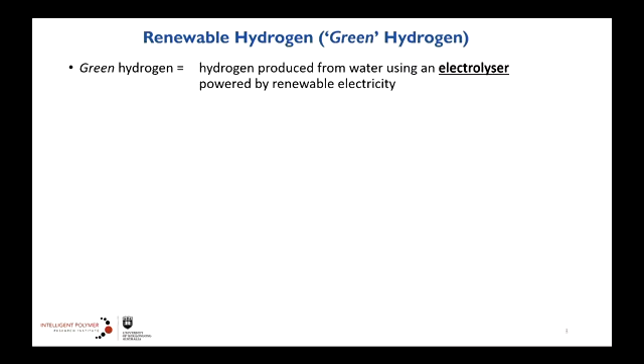Thanks very much, everyone. I will be talking today about a new type of water electrolysis that we developed called bubble-free capillary electrolysis and its application to industrial water electrolysis. So, first of all, let me start by talking about renewable hydrogen, which is also called green hydrogen. Green hydrogen is hydrogen produced from water using an electrochemical device called an electrolyzer. And that electrolyzer, to make green hydrogen, has to be powered by renewable electricity.

Now, green hydrogen is effectively a renewable fuel. In other words, you capture the renewable energy in a fuel, and it's a very energy-dense fuel. It contains 33.3 to 39.4 kilowatt hours of usable energy per kilogram. That is significantly more than petrol or diesel, which is around 12 to 14 kilowatt hours per kilogram, and way more than lithium-ion batteries, which are only around 0.265 kilowatt hours per kilogram. So it's potentially a store of renewable energy that you can transport and use in other places.

At the moment, green hydrogen offers the only viable way to decarbonize a whole host of economic sectors called the hard-to-abate sectors. These are things like shipping, aviation, heavy transport, and chemicals. If you think about a passenger aircraft flying between continents, there's no way that can be powered by batteries. Batteries just are not energy dense enough, but they can potentially be powered by hydrogen. That's really where hydrogen comes in. Those sectors produce about 30% of global CO2 emissions, and green hydrogen is pretty much the only way to decarbonise them.

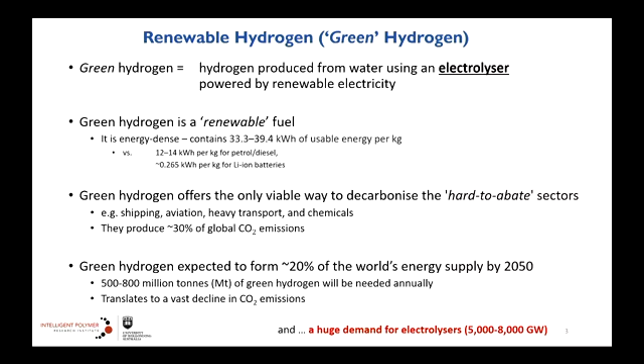That means we will need around 500 to 800 million tonnes of green hydrogen produced annually by 2050, which obviously translates to a vast decline in CO2 emissions, but for the purpose of this talk, it also translates to a huge demand for electrolyzers, around 5,000 to 8,000 gigawatts. To give you an idea of that scale, the entire Australian electrical grid is less than about 50 gigawatts at the moment. So we're talking a huge demand for electrolyzers.

So what are electrolyzers? As I said, they are electrochemical devices that produce hydrogen from water using electricity. Electrolyzers have actually been around for over 200 years. The first electrolyzer was developed in around 1800, and they've been used industrially for well over 100 years. Back in the 1900s, various governments were using them to fill military observation balloons. Those were probably the first real industrial application for electrolyzers.

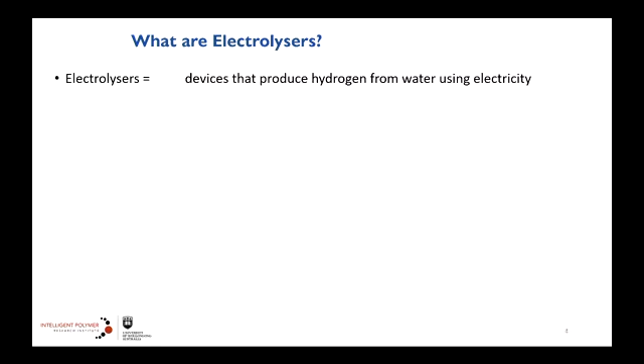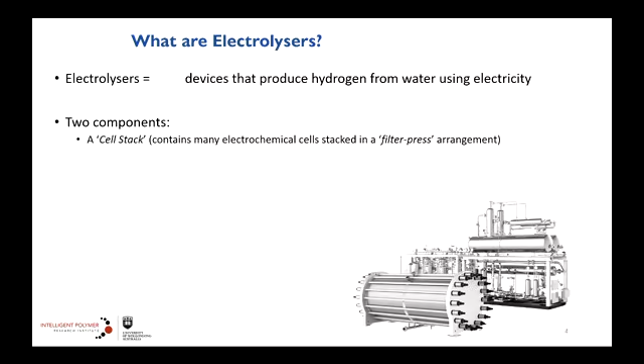So what do they consist of? So this is a picture of an electrolyzer, and you can see that there are two components here. Firstly, there's what's called a cell stack. So that's the thing in the front, that round thing. That contains many electrochemical cells all stacked in what's called a filter press arrangement. So each cell is disposed as a planar disc, and then you have many of these planar discs all stacked together, and each of those discs is producing hydrogen, and the hydrogen is all collected together, and it comes out of this thing called the cell stack.

And then the second thing that you have, and they come in different sizes. This is a small cell stack that you can buy. You also get very large ones. In fact, some of the largest are probably several meters high. And then the second part of it is what's called a balance of plant, which is the engineering system around the cell stack that manages the cell stack. So that's the thing at the back of this picture. And you can see there are various tanks and pipes and pumps and sensors, etc.

There that manage it. The balance of plants typically are all automated. So they have a thing called a PLC, which will control what goes on inside the cell stack. It'll manage the cell stack. It'll manage the gases coming out, the pressure of the gases coming out, also manages the safety of the system. So the total energy consumption of an electrolyzer is the energy consumed by the cells, and that is by far the majority of the energy needed to make green hydrogen, and then also the energy consumed by the balance of plant.

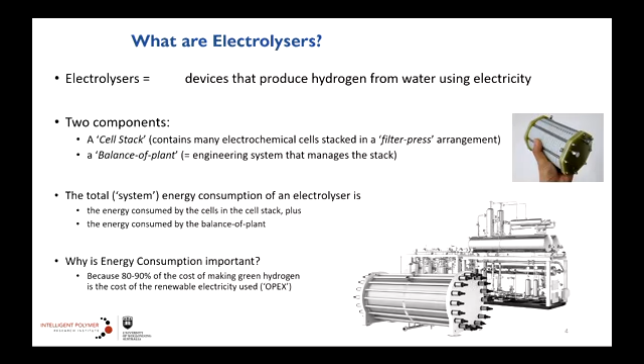So why is energy consumption important? Well, the main reason energy consumption is important is because 80 to 90% of the cost of making green hydrogen is the cost of the renewable electricity used. It's what they call OPEX, or the operating expenditure. And so the more efficiently you can use the renewable electrical energy coming in, the cheaper your green hydrogen is. The less efficiently you use it, the more expensive it is. And then the other 10 to 20% is the cost of the equipment, which is called the CapEx, or capital expenditure.

Okay, so I've been working in hydrogen probably for 30 years, but in the last 12 to 15 years, I've been working in the electrolyzer industry. And a few years ago, I had some students, and we were looking at what is the next big thing going to be in hydrogen. And so we looked at how the architecture of electrolysis cells had evolved over time. And so this is just showing schematics of what electrolysis cells look like and how they've changed.

So on the left here, we've got what could be called a classic electrolysis cell. You've got two electrodes, an anode and a cathode. They're immersed in a liquid electrolyte, an aqueous electrolyte. And you put an electric current through them. And when you do that, the one electrode produces bubbles of hydrogen, that's the cathode. And the other electrode produces the bubbles of oxygen, that's the anode. And then a very critical component here is what's called a separator, which is the thing between the two half cells. And the separator has very special properties.

It has to allow ions, I-O-N-S, to flow between the anode and cathode to complete the reaction, but it has to stop the bubbles of oxygen from mixing with the bubbles of hydrogen. And the reason for that is that if you get more than around 4% hydrogen in your oxygen or 4% oxygen in your hydrogen, then that gas is an explosive mixture. You know, hydrogen and oxygen is rocket fuel, and so you don't want them mixing at all. And so that's what the separator does. Now, as I say, this is a classic cell. This was used for hundreds of years.

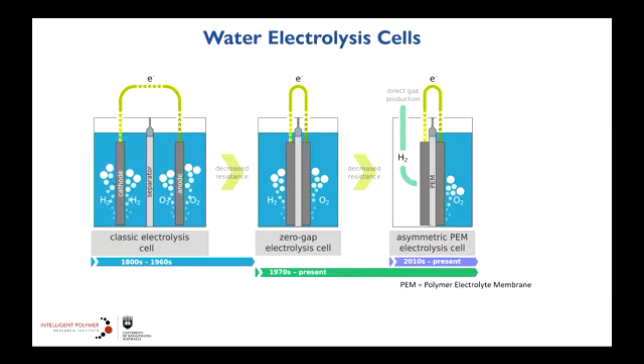And, let me maybe go back here then. How do I go backwards?

Sorry about that. Well, actually, let me go here.

Okay, now I sort of jumped a bit ahead of myself here, so let me just go back a little bit to where I was there. So that was the challenge we were looking at.

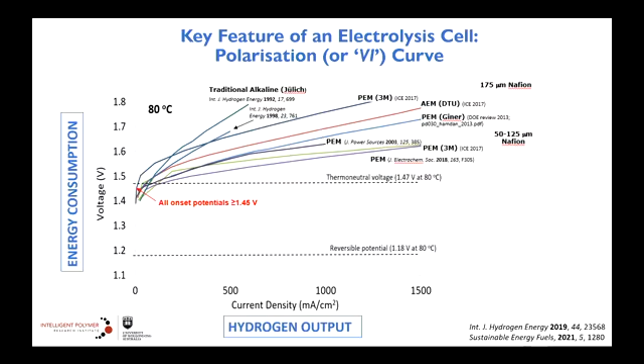And if you're trying to make these cells more efficient, you have to find a way to bring that curve down. And so you have to then find a way to reduce the onset potential. And we've spent a lot of time working on how to reduce that onset potential. It's not something that has been widely studied.

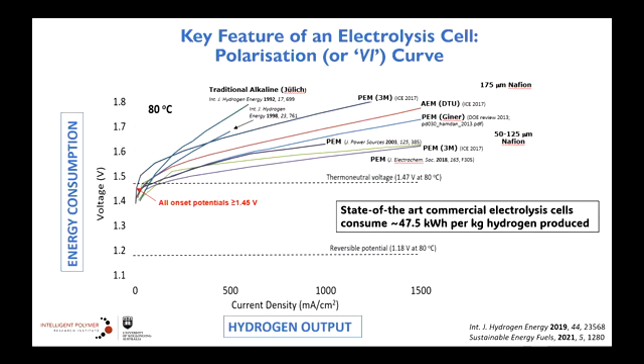But right at the present day, if you look at the best state-of-the-art commercial electrolysis cells, they consume around 47.5 kilowatt hours per kilogram of hydrogen produced. And that is, as I say, the state of the art.

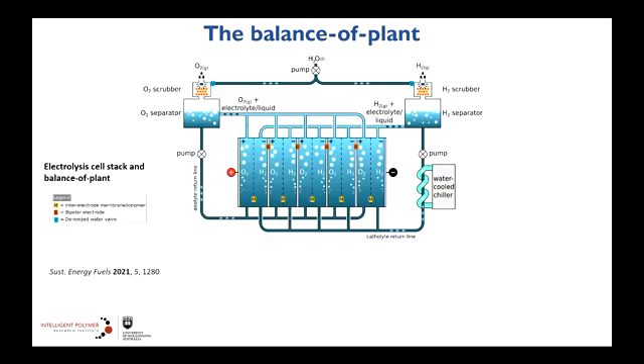So now also these systems produce a lot of heat because they're not very efficient, and so you need typically a water-cooled chiller to cool down the system, keep it at temperature, and you can have that on each return line or you can have it just on one. And then to replenish the water that's being consumed, you typically would have a pump up here pumping water into the scrubbers where it drips down and replenishes the liquid that's being used.

So what you can see is at least two large liquid circulating pumps, two gas liquid separators, a whole lot of piping, water-cooled chiller, and then you've got, in a typical alkaline system, around 10,000 litres of water per megawatt circulating all the time. So quite energy intensive.

A typical balance of plant would consume between 2.5 to 5.5 kilowatt hours per kilogram. And the way you get to the 2.5 is just having a very large system so you can get economies of scale. But a smallish system, a megawatt, for example, which is still pretty big, would be using around 5.5 kilowatt hours per kilogram. And so the total energy consumed by a conventional system is around 50 to 53 kilowatt hours per kilogram to produce a kilogram of hydrogen.

And hydrogen, as we said, contains, at best 39.4 kilowatt hours per kilogram. So there's a big gap between the amount of energy it contains and the amount of energy used to make it. And so that is what makes green hydrogen expensive at the moment.

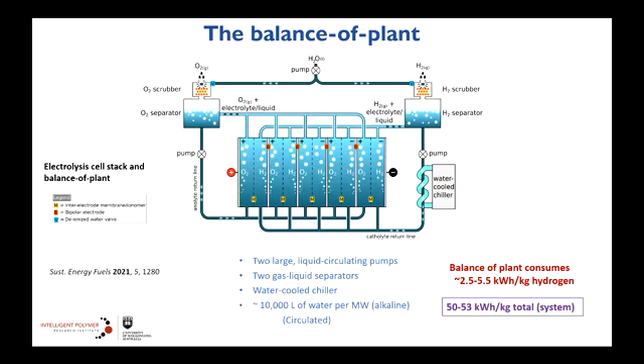So in this particular case, what we were trying was a new way of making the system bubble-free. And so what we were trying to do was to design electrodes which would draw liquid out of the separator, but just enough liquid to wet the electrodes with a thin layer of liquid. And why it needed to be a thin layer of liquid was that when the gas was produced, we wanted it to dissolve in that layer, migrate through that layer and leave.

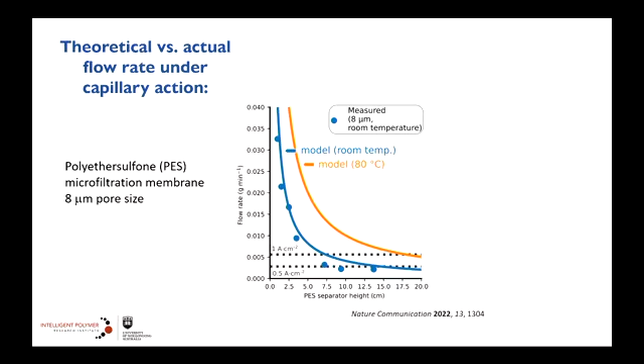And you can see that at 80 degrees, which we couldn't actually measure but we could model, we could sustain an amp per square centimetre to a height of about 18 centimetres. It's about that high. So that's kind of about the height you need to make a commercial cell. And so we then set about testing this particular membrane as a separator to see how it worked.

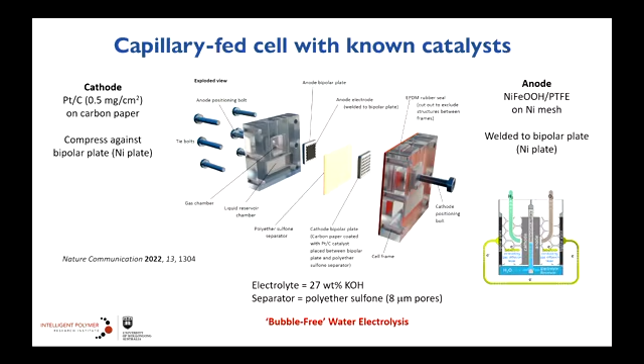We used an electrolyte of 27 weight % potassium hydroxide with this separator, and we were able to observe bubble-free water electrolysis, which was very exciting. And if there's time later, I can explain to you how we knew for sure it was bubble-free. But this was really the key finding out of that work.

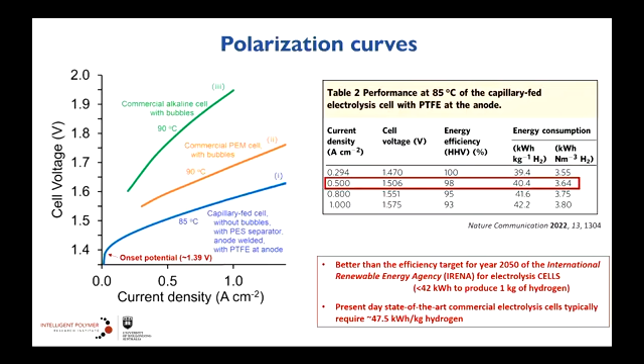And you can see 40.4 kilowatt hours per kilogram cell consumption. The best commercial cells today are 47.5 kilowatt hours, so a significant improvement there. Also for the balance of plant, just because the gases were produced directly in the cell, it resulted in a whole lot of simplifications in the balance of plant that sort of flowed on from that.

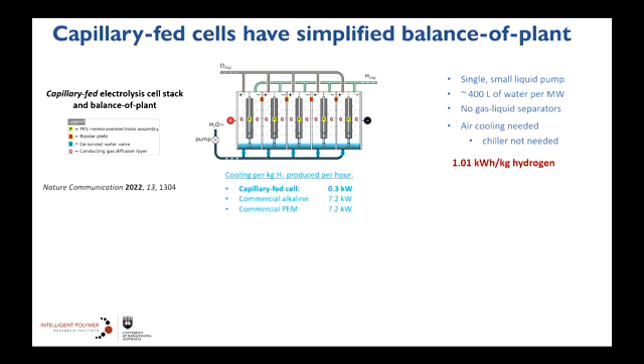And so you have a single small pump for your liquid. You have around 400 litres of water per megawatt, not 10,000 litres. You don't need gas liquid separators, you don't need all the pipes for that, and you don't need a chiller. You can do air cooling of the system. And so this balance of plant only requires around 1.01 kilowatt hours per kilogram. When you add that to the 40.4 kilowatt hours we had earlier for the cell, the total energy consumption is 41.5 kilowatt hours per kilogram, which is significantly better than the best commercial system out there.

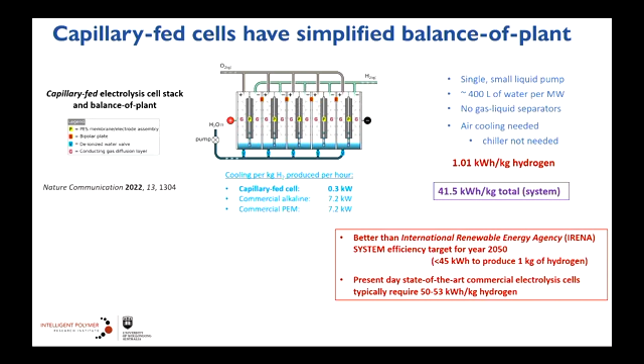And in fact, IRENA also has a target for the system efficiency of electrolyzers for the year 2050. It was that they needed to be less than 45 kilowatt hours to produce a kilogram of hydrogen. You can see we're already substantially below that. Today, the very best commercial electrolyzers require system energy consumption of around 50 to 53 kilowatt hours. So around a 20% improvement in efficiency. And that obviously has a big effect on the cost of the green hydrogen that you produce.

And so once we realized all of this, we set up a spin-off company we called Hysata. That was spun out in 2021. And this is just a quick summary of the value proposition. So first of all, it offers the lowest levelized cost of green hydrogen in the industry, and that's mainly because we have much lower OPEX. It turns out we have a lower CAPEX because we have a much simpler stack and a lower cost balance of plant. It also turns out that this architecture is very amenable to integration with renewables.

One of the issues with renewable energy is that it fluctuates. You know, as a cloud goes in front of the sun, your current goes down. As the wind stops blowing, and so you tend to have fluctuating currents with renewable energy. And a key issue for electrolyzers is to be able to follow that current.

And so you need dynamic performance. Now, a lot of alkaline electrolyzers in general can't follow that sort of renewable energy very well because they have all this stuff pumping around all the time. In our case, we have very fast dynamic performance. In fact, we believe it's the fastest in the industry. It tracks changes in current extremely rapidly. We haven't been able to measure how fast it adjusts, but as fast as we can change it, it follows it. And so we can track renewable electricity down to almost zero, as it goes up and down.

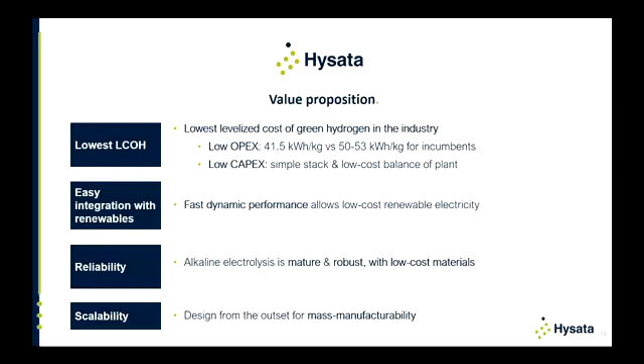In fact, before our first investors would invest, they sent 2 engineers to work with us to make sure that this technology could be turned into a high volume manufacturing process. And we actually worked with them for about 6 months before they would invest. But they were convinced at the end, and we have developed this now into a technique, into a cell that can be mass manufactured.

So this is a very high level cartoon to show you what our cells look like. This is the Hysata cell, made in the form of a disc. We have an injection molded plastic frame that we attach our separator to. That's kind of welded to that. And then we have a cathode that fits in on the one side, an anode on the other side, and we have a reservoir at the bottom. And then we seal this with a nickel disc on the outside on each side. So the whole cell is sealed. But I'll explain to you how the gases get out and the liquid gets in in a minute.

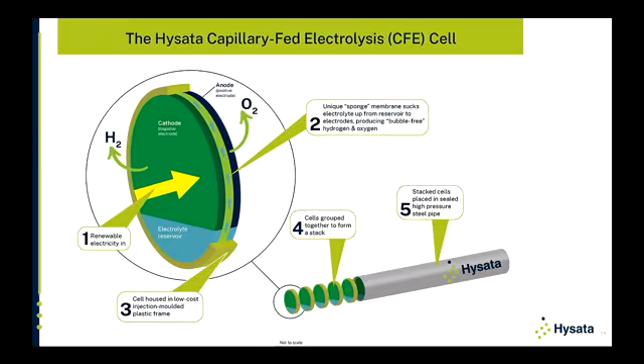And then we take these cells and we stack them inside a pressure vessel, and we're using just a stainless steel pipe, which is the cheapest pressure vessel you can get. You group them together, you put them into the pipe, and then you can make your hydrogen and oxygen. So I can't show you the exact design because unfortunately that is proprietary, but this will give you a high-level view of how we manufacture these things.

So as I say, we injection mold a cell body, which looks like that, and you'll see it has these holes in it, which are called headers. We attach a separator to that. Nowadays we weld it, but earlier we had a frame that held it in place. We then have 2 electrodes, which are tied up against each side. We have a metal spring, a conductive spring, which goes on each side and provides the clamping force to hold the electrodes tight against the separator.

And then we have, as I said, this disc, which they call a bipolar plate. These are nickel discs on each side. They get welded to the cell to make a closed cell. And then you stack these things together, shown over here. And these holes, the headers, all line up, and they form little tunnels inside the stack, and they connect downwards to each side of the separator. So your hydrogen all comes up and goes out via one of these tubes. The oxygen goes out via another tube. And then we have tubes that carry water in and maintain the reservoir, and a tube that carries water out.

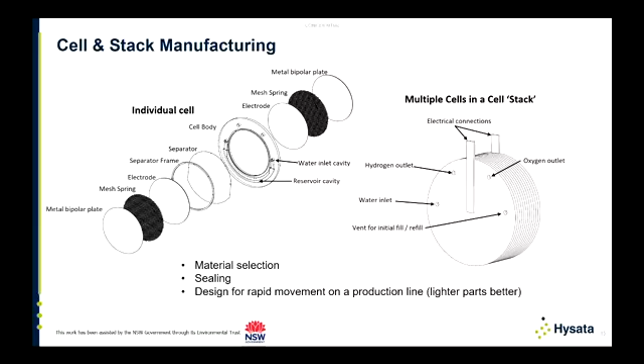And we've developed these now at full commercial size, and significant cells in stack, and they work much as the original technology did. So developing these things, there are a few important factors we had to take into account. First of all was material selection. We had to develop sealing methods. We also had to design them for rapid movement on a production line, and so we wanted to keep the parts light.

The main reason for putting these things inside pressure vessels is that the pressure inside the cell and outside the cell, between the cell and the pressure vessel, is much the same. And so the cell frame doesn't have a big pressure differential over it, and so it doesn't need to be very strong and robust. It can still produce gases at high pressure, but without being big and heavy. And that was because we wanted rapid movement on the production line.

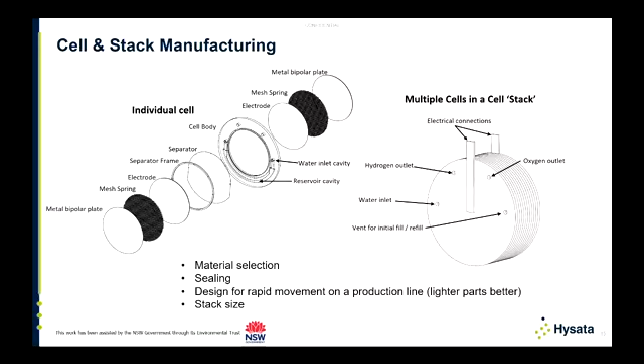And we also had to develop the stack size. So some of the lessons learned there was, first of all, there's a big difference between science and engineering. And I think, well, I've known this for a long time, but I guess maybe other people haven't realized it. You really should partner with engineers early. I'm a big fan of engineers.

Some of the important lessons: we considered the need for high volume manufacturing from the outset. We developed the balance of plant in parallel. On previous occasions, we've tried to develop commercial cells. We've tried to develop the cell first and then the balance of plant, and that doesn't work. You need to do everything in parallel and make sure that both work and they interact well.

Supply chain is really, really important. You need to have your supply chains in place early, especially nowadays with COVID and supply disruptions, long lead times. You need seasoned design, process and manufacturing engineers, and we've been very fortunate in Hysata to hire some very seasoned and very knowledgeable design engineers and process and manufacturing engineers.

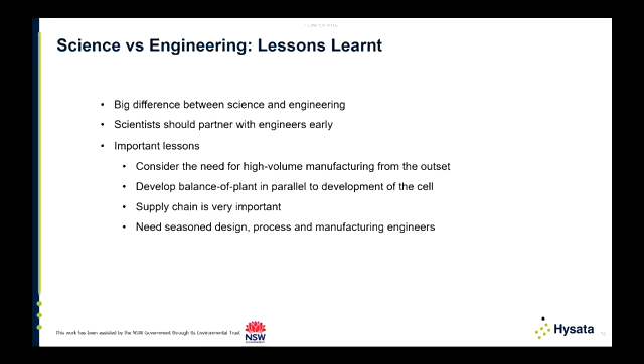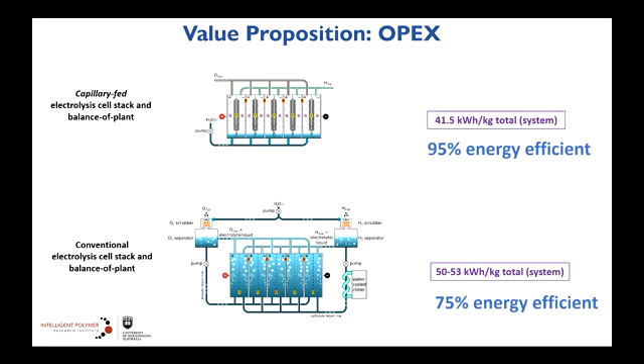So the value proposition, I'll just go back to the comparison of the capillary fed cell with the conventional cell. So the total system energy consumption is 41.5 kilowatt hours per kilogram on the capillary fed cell, 50 to 53 kilowatt hours for a conventional system. So that's around 95% energy efficient all in, taking everything into consideration, versus around 75% energy efficiency all in for a conventional system. That has an enormous effect on the cost of the hydrogen that you produce.

So what we've got here is just an illustrative example of a renewable energy project producing 1 million tonnes of hydrogen per annum. And this is looking at it in US dollars. So there are innumerable energy export projects planned for Australia, and this is the sort of thing that they are looking at. So if you used incumbent electrolyzer technology, you would need 75% efficiency, 52.5 kilowatt hours. You'd need 14 gigawatts of renewables and around 7.6 gigawatts of electrolyzers to make your 1 million tonnes per annum.

If you use the capillary cell system, 95% system efficiency, 41.5 kilowatt hours per kilogram, you only need 11 gigawatts and 6 gigawatts of electrolyzers. You still make your 1 million tonnes of hydrogen per annum. And if you look just at the renewables, there's a 3 gigawatt reduction in renewables. Renewables cost about $1 billion US per gigawatt. So that's a saving of $3 billion US right from the start.

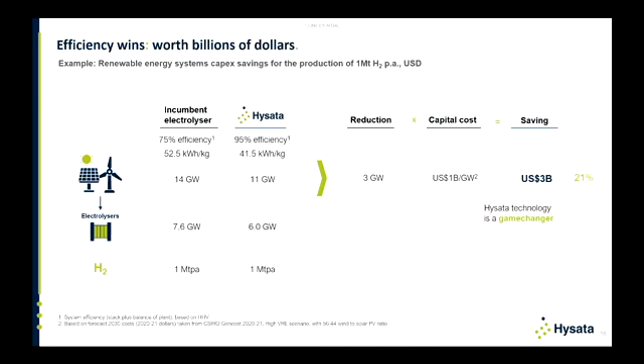And the sort of customers that we are talking to at Hysata are telling us this is really a game changer for them. For many of them, it's the difference between being economic and uneconomic. So we've had a lot of commercial interest in this. And in fact, I think it's fair to say there's been truly incredible demand. Hysata has already signed up $5 billion in orders. Now, these are conditional orders, conditional on achieving the efficiencies that are shown there. But nevertheless, that's quite incredible, really, I think. And about 4 times that under negotiation.

So there's really an opportunity here, I think, for us to hopefully make a big dent in decarbonising our systems, and also giving Australia a competitive advantage in energy export of hydrogen. So it's very exciting. I guess time will tell how it all pans out in the end, but so far so good. So let me end there.

I'll just acknowledge my colleagues down the bottom here who did the work, especially the first 2 colleagues here, Aaron Hodges and Linh Hoang. They were the 2 PhD students who worked on this project, both mature age, and I have to say, excellent PhD students. They are now both working at Hysata, so they've actually created jobs for themselves, which is great as well. And then I'd like to acknowledge also the organisations here that provided grants and funding.

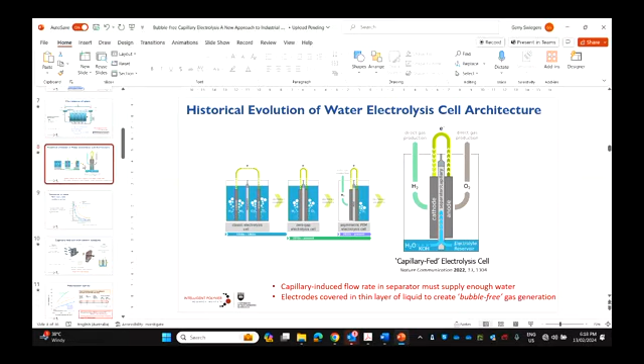Yeah, so I think the question that's being asked is, you've obviously filled the separator with this liquid electrolyte, and so initially when you start, it's all the same molarity of the KOH in there, but once it starts operating, you are converting water in the separator to hydrogen and oxygen, and so the concentration of KOH in there should just keep increasing, right? And so that was a key concern for us early on.

What we found was actually quite remarkable. When you run this thing, yes, the concentration should increase, but it doesn't. What happens is water goes up and replaces the water that's consumed totally spontaneously, and the KOH concentration remains the same everywhere in this thing all the time. Doesn't matter how you run it, hard, soft, doesn't matter what.

And so we think that there's a capillary effect drawing the water up, but there are other effects going on there as well, we think, and one is maybe an osmotic effect. So osmosis is the process where water will move from an area of low concentration to an area of high concentration to equalize it, and we think that could be a driving force here as well.